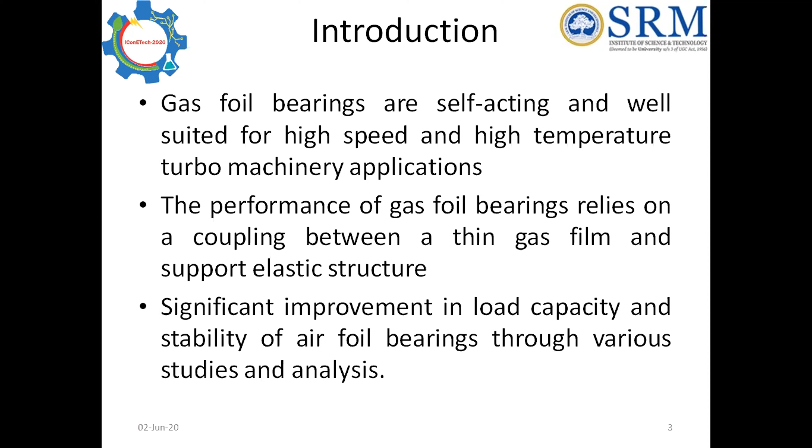So my presentation outline is the following: introduction, objective, analysis, results and discussions, and conclusion. So in the introduction, the gas foil bearings are self-acting and well suited for high speed and high temperature turbo machinery applications, commonly called high speed machineries.

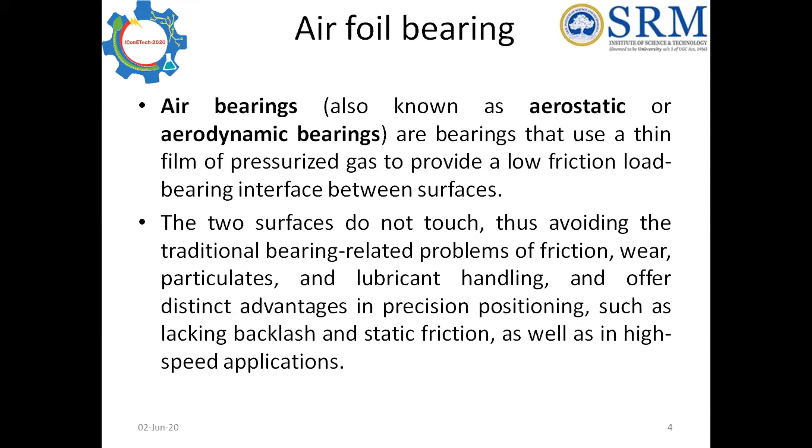The performance of gas foil bearings relies on a coupling between a thin gas film and a supporting elastic structure. Extensive analytical and experimental studies over the past decades have resulted in significant improvement in load capacity and stability of airfoil bearings. There are many studies already done in these areas to find the static and dynamic behavior of the gas foil bearing.

The purpose of this study is to investigate the load carrying capacity of a foil journal bearing with a bump recess. That is our objective. Before that, I want to explain what an air bearing or gas bearing is. It works on the aerostatic or aerodynamic principle. Air bearings use a thin film of pressurized gas to provide a low friction load bearing interface between the surfaces. The two surfaces do not touch, so friction is avoided.

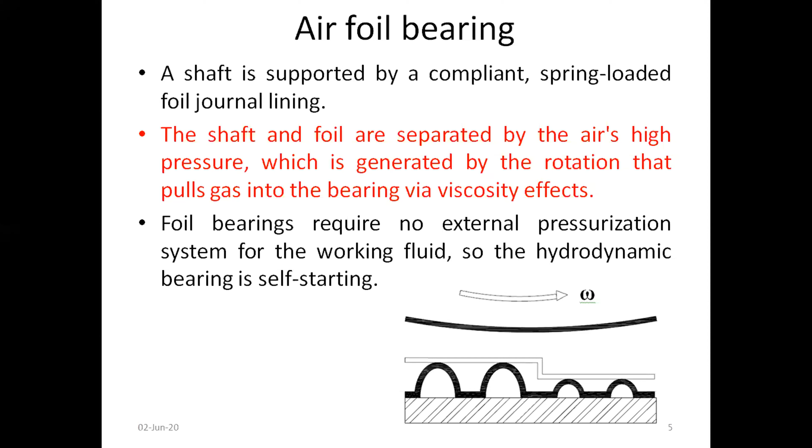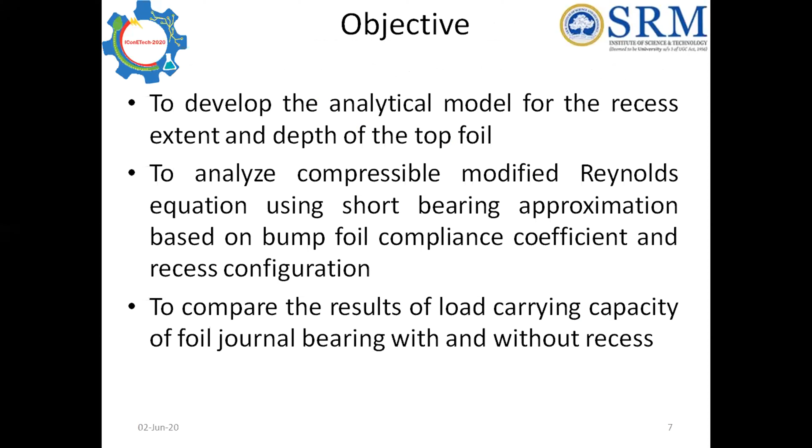If there is no friction, there is no wear and no wear particles, and the lubricant handling system is also minimized. It is one of the major advantages, and using lubricants in the bearing is also difficult and complicated. The leakage of lubricants will increase the friction between the shaft and bearing. So this airfoil bearing ensures the shaft and foil are separated by high air pressure, generated by the rotation that pulls gas into the bearing. This pressure is achieved by rotating the rotor at high speed.

So here this represents the rotor, which is rotating at the speed of omega, and this is our airfoil bearing. The high air pressure is generated between this rotor and this top foil, so that it is uniformly distributed on the bump and the recess of the bearing due to this top foil, so that we get stable rotation of the rotor and good dynamic and static performance.

So the objective of this study is to develop the analytical model for the recess extent and depth of the top foil, to analyze the compressible modified Reynolds equation using short bearing approximation based on bump foil compliance coefficient and recess configuration, and also to compare the load carrying capacity of the foil journal bearing with and without a recess. That is what is presented in this presentation.

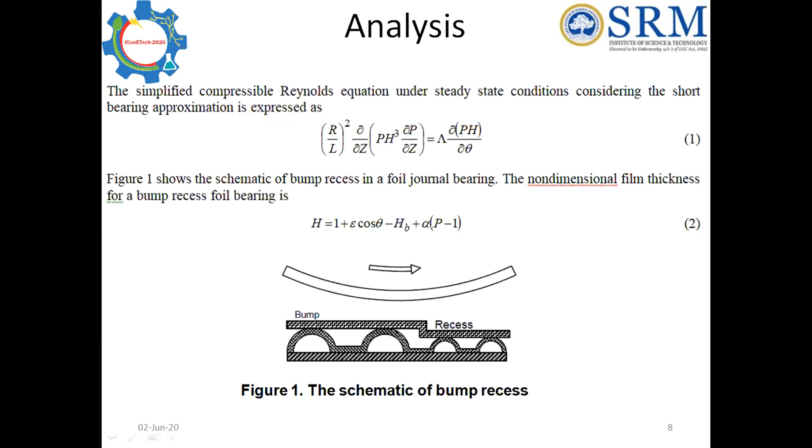For these analyses, the compressible Reynolds equation based on short bearing approximation is analyzed. The hydrodynamic non-dimensional pressure in a bump recess foil journal bearing is iteratively solved considering the change in film thickness due to deflection of the compliant foil surface. The simplified compressible Reynolds equation under steady state conditions considering the short bearing approximation is expressed as follows: (R/L)² ∂/∂Z (PH³ ∂P/∂Z) = Λ ∂(PH)/∂θ.

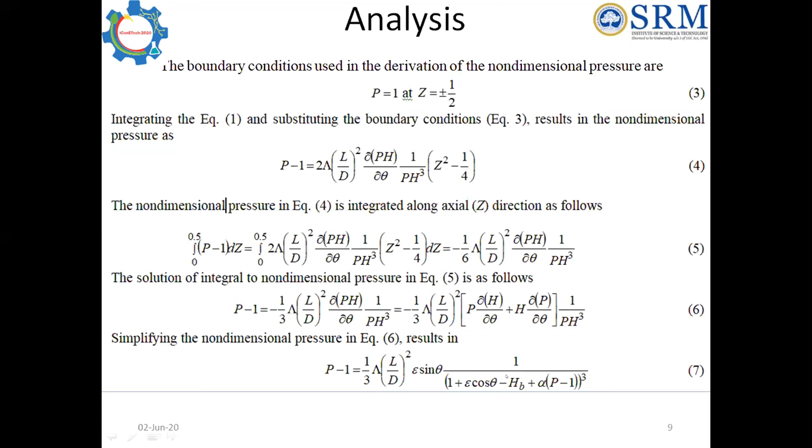This figure shows the schematic of the bump recess in a foil journal bearing. The non-dimensional film thickness for a bump recess foil bearing can be obtained as H = 1 + ε cos θ − HB + α(P − 1). Here ε is the eccentricity ratio, HB is bump height, P is pressure, and α is the compliance coefficient.

By integrating equation 1 with the boundary conditions P = 1 at Z = ±1/2, we get P − 1 = 2Λ(L/D)² ∂(PH)/∂θ · 1/(PH³) · (Z² − 1/4). The non-dimensional pressure in equation 4 is integrated along the axial Z direction, giving the following equation in simplified form.

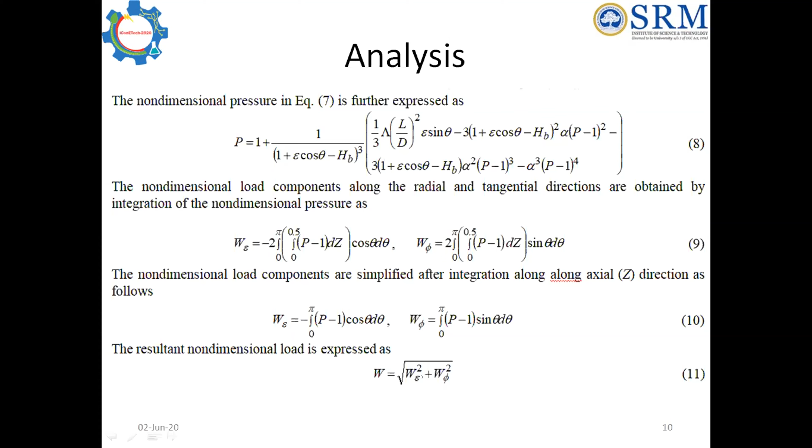The solution for this non-dimensional pressure is obtained like this, and by simplifying the above equation, we get the non-dimensional pressure P − 1 = 1/3 Λ(L/D)² like this. The non-dimensional pressure is further expressed in terms of P. Here we can apply the values of L/D, ε, θ and HB. The HB equation is already shown.

By substituting the non-dimensional values of these parameters, we get the load carrying capacity, and we plot the graph between load carrying capacity and different recess extents. The non-dimensional load components along the radial and tangential directions are obtained by integration of the non-dimensional pressure.

So this W is the non-dimensional load carrying capacity along the radial direction. This W is along the tangential direction. So in this equation we are substituting the values and we are getting the resultant non-dimensional load, and the resultant non-dimensional load is expressed as follows: W is equal to root of W epsilon square plus W phi square, and the results are obtained and plotted like this.

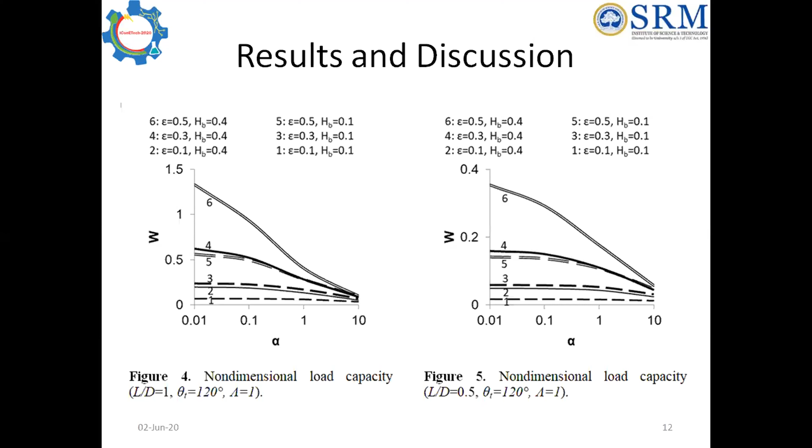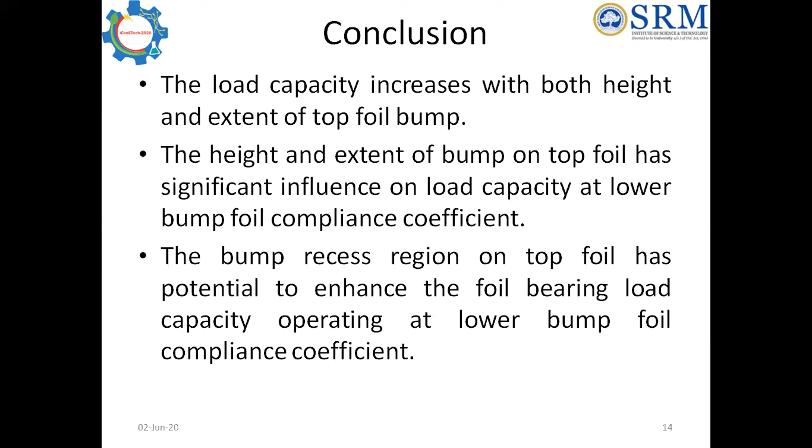And next, the graph is plotted between the non-dimensional load capacity and the compliance number. When the compliance coefficient is increasing, the load capacity is decreasing. So for all values of bump height and eccentricity ratio, it keeps on decreasing and approaching almost 0. So here also for L by D 0.5, theta t 120 degree, and bearing number lambda 1, it is almost reaching 0.

So from this we can conclude, for the non-dimensional load capacities of bump recess foil journal bearing with varying bump foil compliance coefficient for different L by D and eccentricity ratios, the non-dimensional load capacity increases considerably with the increasing non-dimensional top foil bump. The non-dimensional load capacity decreases substantially with increasing bump foil compliance coefficient from 0.01 to 10. There is no significant improvement in the non-dimensional load capacity with increasing non-dimensional bump height on the top foil from 0.1 to 0.4 at a higher bump foil compliance coefficient.

So from this, we can conclude the following things. The load capacity increases with both height and the extent of the top foil bump. The height and extent of the bump on top foil have significant influence on load capacity at lower bump foil compliance coefficient. The bump recess region on top foil has potential to enhance the foil bearing load capacity operating at a lower bump foil compliance coefficient. And these are the references we had taken.